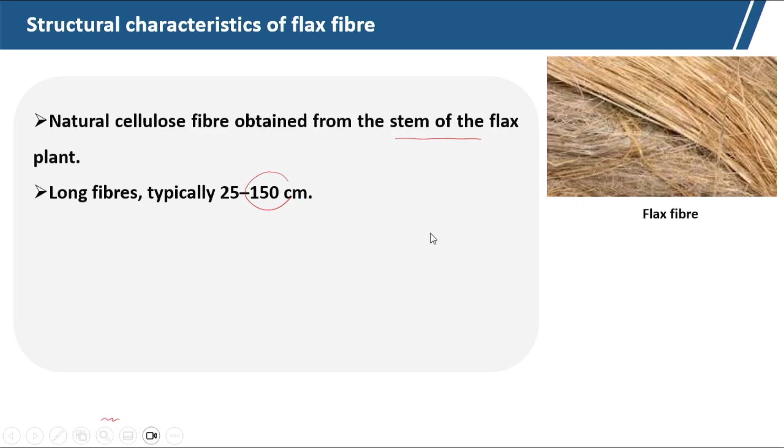It can be as long as 150 centimeters, a very long 1.5 meter fiber. So, typically from 25 centimeters to 150 centimeters, a relatively coarser fiber, not very coarse, basically 12 to 16 micron, with a slightly convoluted smooth surface with nodes along the fiber length. And sometimes we get longitudinal serrations.

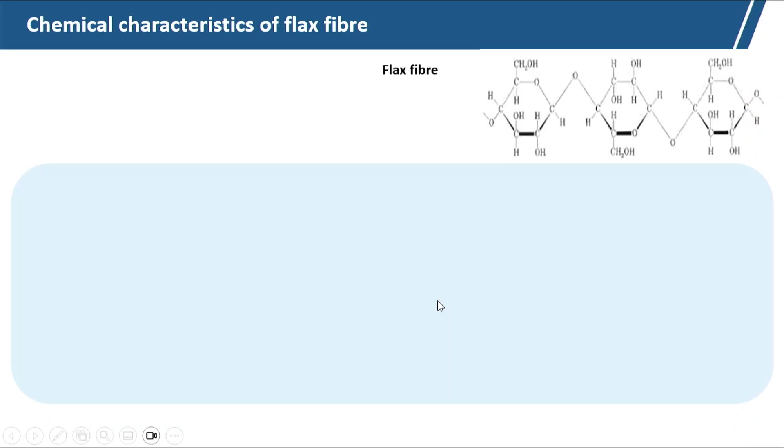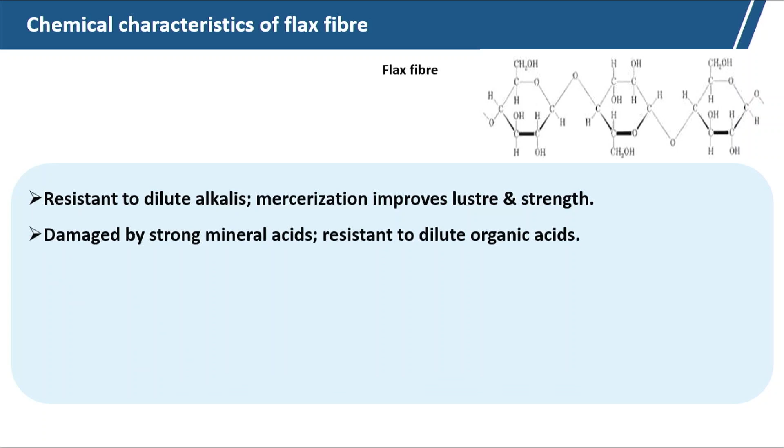Now, if we see the chemical characteristics, these are basically cellulose fibers. So, it is resistant to dilute alkali, and mercerization improves its luster and strength. It is damaged by strong mineral acid, resistant to dilute organic acid, and we can bleach it with hydrogen peroxide or sodium hypochlorite. It is resistant to most organic solvents, acetone, alcohol, and burns readily with a paper-like smell, like cotton.

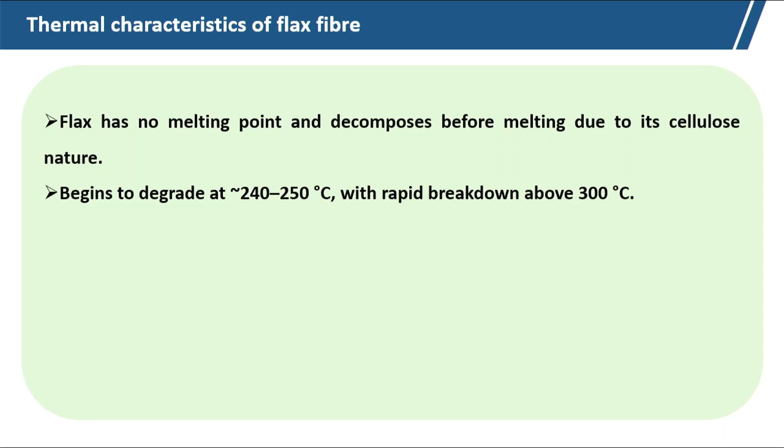If we see the thermal characteristics, flax has no melting point and decomposes before melting due to its cellulosic nature, like cotton fiber. It begins degradation around 240 to 250 degrees Celsius. Just like cotton, it rapidly breaks down above 300 degrees Celsius. Ignition point is 480 to 500 degrees Celsius, and it rapidly burns and gives a paper-like smell. Prolonged heating causes yellowing and loss in strength.

Thermal conductivity is higher than cotton and wool fiber. That is why this fiber is typically called a cool fiber, due to high Qmax, that is, instantaneous heat absorption. It loses insulation ability when wet, but still dries quickly, because its thermal conductivity increases with moisture absorption. It is flammable like other cellulose fibers, but with less afterglow than cotton. Cotton gives the higher afterglow.

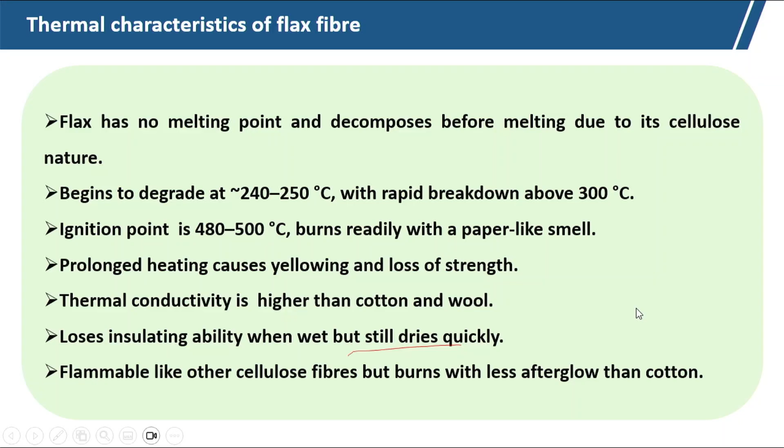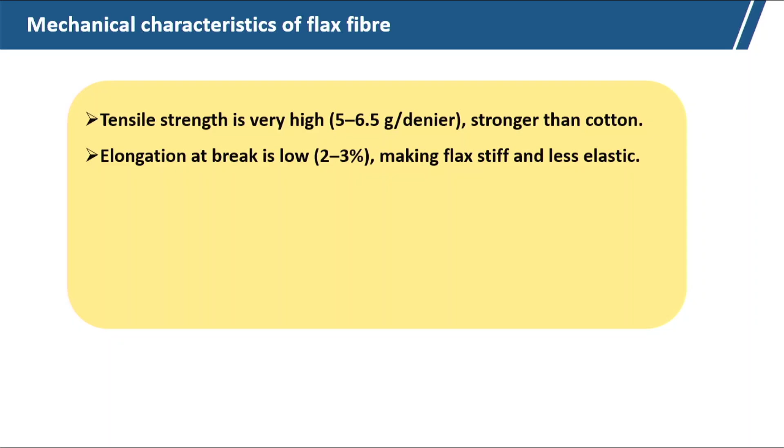Mechanical characteristics of flax fiber: tensile strength is very high, around 5 to 6.5 grams per denier. It is much stronger than cotton. Elongation at break is typically 2 to 3%, lower than cotton. It makes flax stiffer and less elastic. Elastic recovery is poor, with limited flexibility compared to wool and cotton. So, it gives lower elongation, but the uniqueness is there.

It is basically a stronger fiber, and also its thermal conductivity is more. So, it gives a cool touch, and due to the higher Qmax value, Qmax meaning instantaneous heat absorption, fabric made from flax fiber is for summer wear. Due to the very high tensile strength, it is used for technical applications, different protective applications. Abrasion resistance is moderate and it does not spring back easily because of its lower elastic recovery.

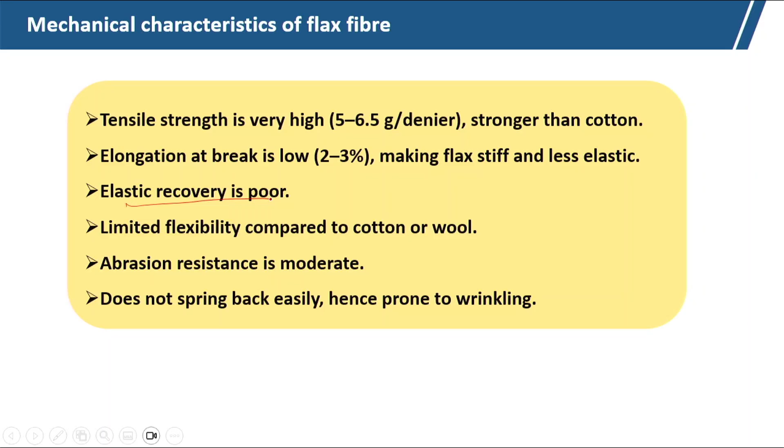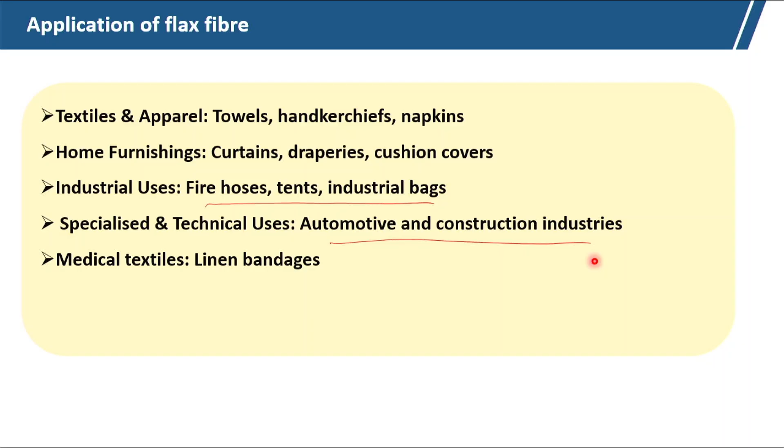The applications we can see here: textile and apparel applications, handkerchiefs, napkins, towels, home furnishing, curtains, draperies and cushion covers. Fire hose, tents, industrial bags, due to its higher strength, automotive and cushions, in the construction industries we can use it, medical linen, bandages for medical applications, and canvas.

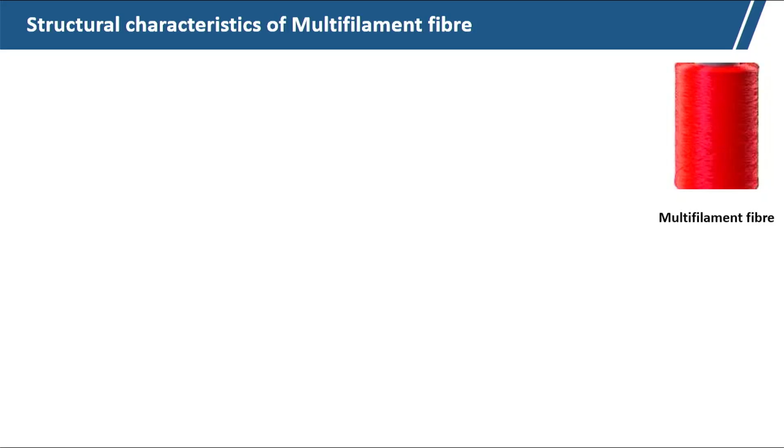Multi-filament fibers are basically continuous filaments. These may be natural and also in synthetic form. The structure of multi-filament fibers is where a number of continuous filaments are bundled together, with a smooth and uniform structure because of the continuous length, and high tensile strength. Because staple fibers are discontinuous, their tensile strength comes mainly from frictional cohesion and the cos theta component of the fiber strength, as I have mentioned. So, in multi-filament or monofilament yarn, the actual filament strength is used 100%.

They are flexible and soft, producing lustrous fabrics, but the fabrics are not as soft as staple fiber fabrics. It can be textured or twisted for bulk and elasticity. So, if we want to increase the elasticity, we can apply twist, and if we want to increase bulk, we can form a texture.

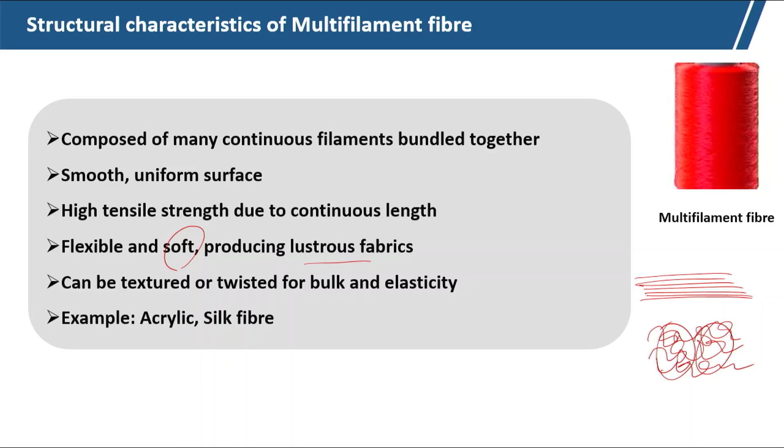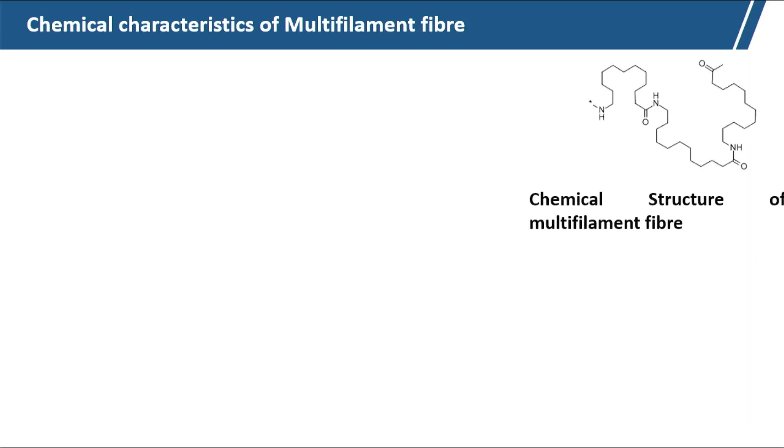So, chemical characteristics depend on the chemical nature of the polymer. So, chemical structure, because depending on the fiber, whether it is synthetic or natural. So, what is their composition. So, whether it is chemically stable depends on the fiber type, and dye absorption also depends on the type of fiber used,

and whether it is resistant to chemicals, acid or alkali, depends on the type of fiber. And it is less prone to degradation than staple fiber. That is basically due to the structure of yarn. For the same fiber, like acrylic, if we use acrylic in filament form and acrylic in staple form, typically the degradation of the staple fiber material will be a little bit higher because of the structure, and it can absorb more chemical and get degraded.

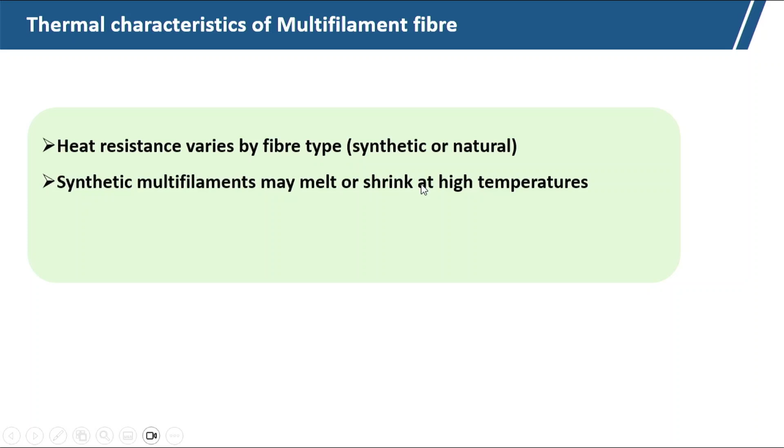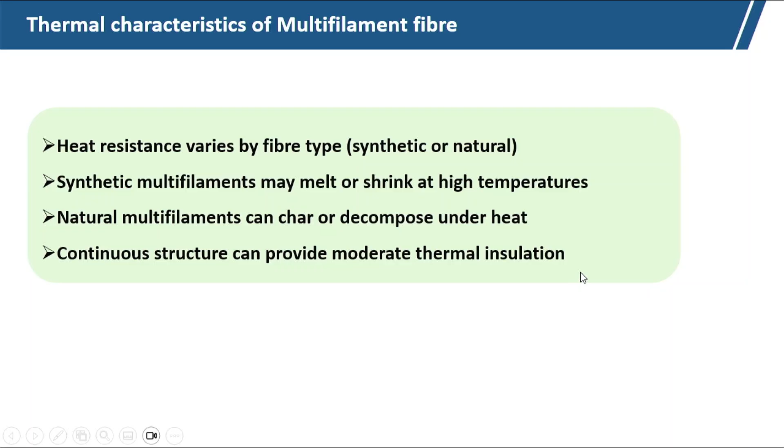Thermal characteristics of multi-filament fibers, again, depend on the type of fiber. It varies, synthetic or natural fiber, and synthetic multifilament may melt or shrink at high temperature, but natural multifilament, that is a natural filament yarn, silk is an example. So, natural multifilament can char or decompose under heat. So, silk is the only natural multifilament we can say. Continuous structure can provide moderate thermal insulation. So, if it is staple fiber, then we can have air entrapment, and the thermal insulation may be higher.

So, mechanical characteristics: higher tensile strength due to continuous structure, good elasticity and flexibility, smooth surface, basically due to the continuous structure the surface will be smoother than the staple yarn, and durable and resistant to breaking.

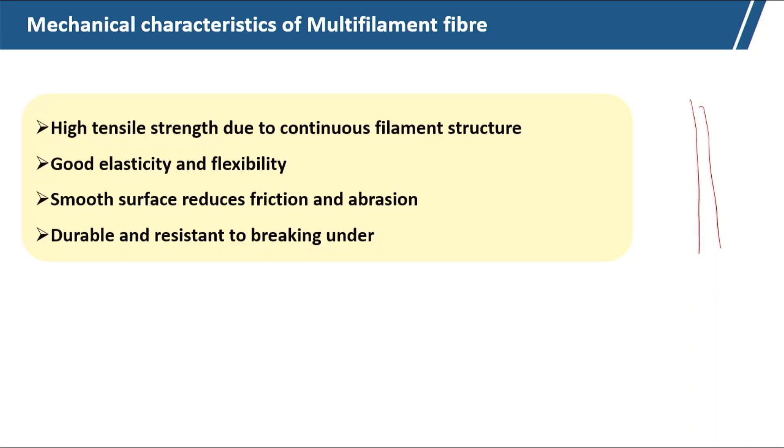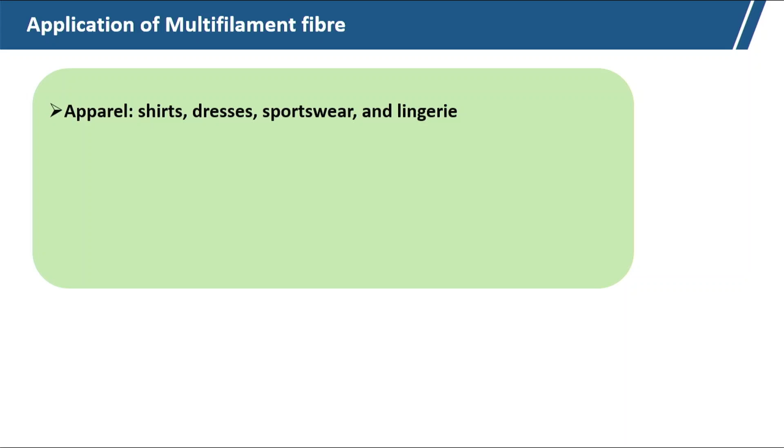Applications like shirts, dress materials, sportswear, home textiles, curtains, upholstery, industrial rope, nets, tire cords, there we need the multi-filament yarn. For tire cord we cannot use the staple fiber. Technical textiles, we can use it in filtration, composites, and geotextiles. Silk is one example of natural multi-filament yarn.

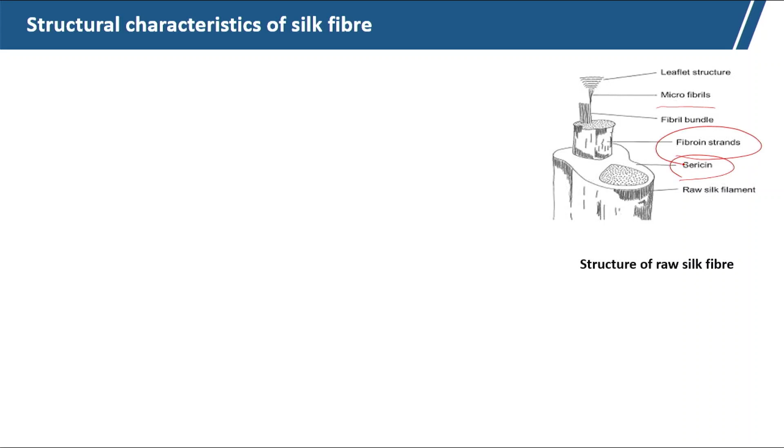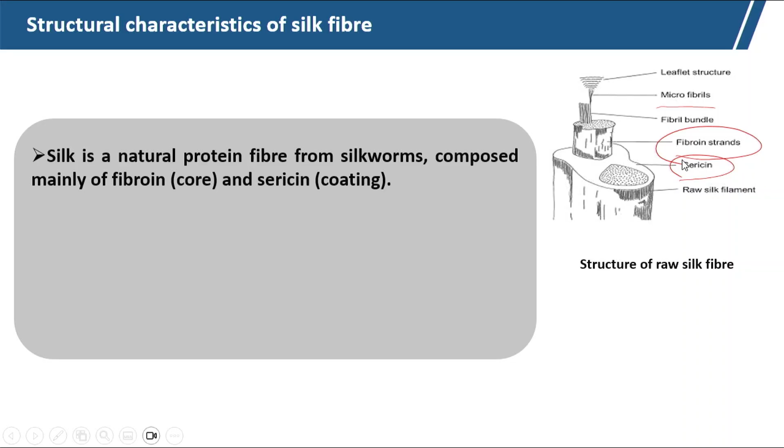Now, let us see the structure of silk. This is the typical structure here. Okay. These are the microfibrils. It has got two components, one is sericin, which is a gummy component, and fibroin. So, it is a natural protein fiber from silkworm composed mainly of fibroin, which is the core, the fibrous component, coated by the sericin gum, and ultimately when we use silk as a fiber, we have to remove the sericin component.

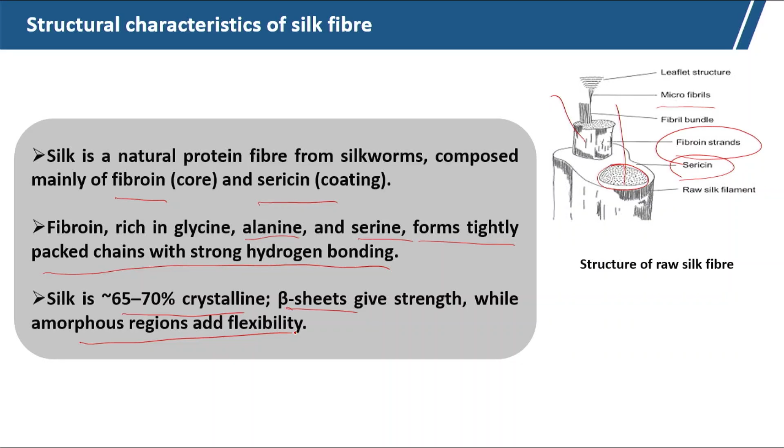So, fibroin is rich in glycine, alanine and serine. These form tightly packed chains. You can see these are very tightly packed chains with strong hydrogen bonding. So, this gives high strength. It is 65 to 70% crystalline; beta sheets give strength, while amorphous regions add flexibility. So, that is the silk fiber structure.

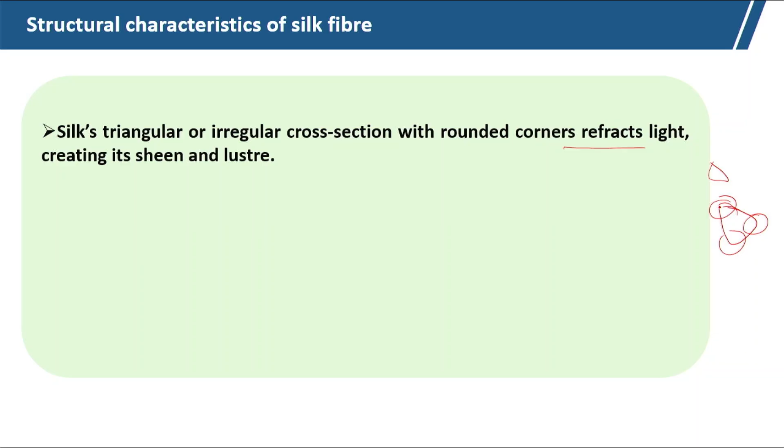It has a typically triangular or irregular cross section with round corners. So, if you see the silk fiber, at the corner it is a little bit round, which refracts light, creating sheen and lustre. That is the beauty of silk, a natural fiber which is lustrous due to the triangular cross section with round corners. This shape refracts the light. Smooth soft surfaces are covered by a thin layer of sericin, removed during degumming.

So, we can see here the silk fiber, typically triangular shape with round corners, and this is covered by a thin layer of sericin, and degumming is required where we remove the sericin. It has very fine and uniform filaments, 10 to 15 micron in diameter. Molecules are highly oriented along the fiber axis, which enhances the tensile strength.

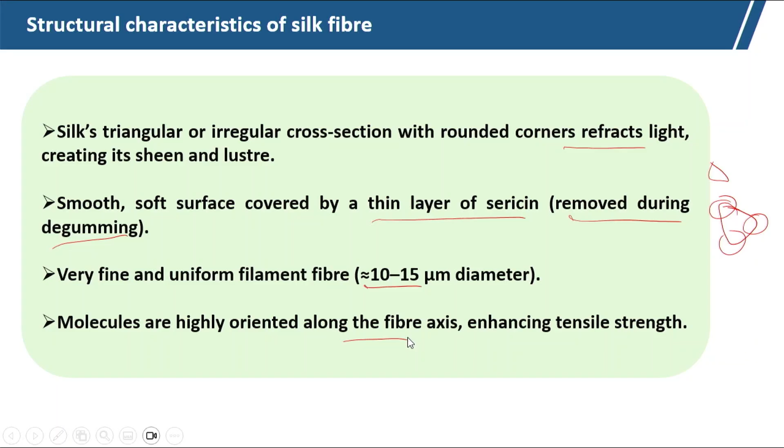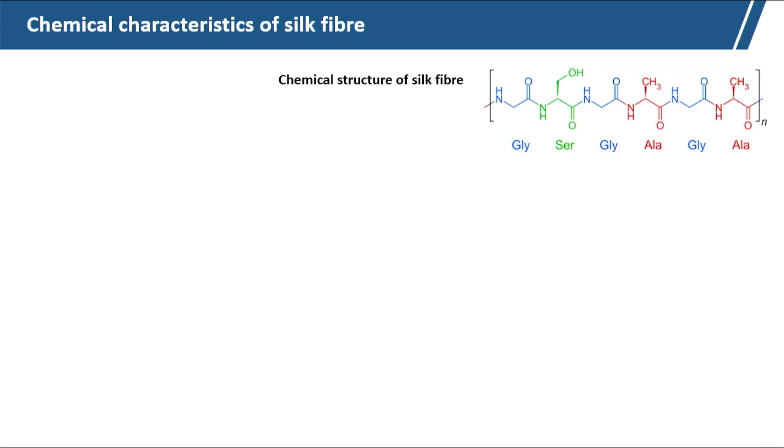Now, the chemical characteristics of silk fiber: it is rich in glycine, alanine and serine, which enables tight molecular packing. It is insoluble in water, but soluble in strong acid, concentrated alkali and certain salts. These can dissolve it. It is resistant to weak acid, but damaged by strong acid, because it becomes soluble in strong acid. So, to weak acid it is resistant.

It is weakened by prolonged exposure to sunlight, and has good dye affinity due to amino groups in fibroin. So, due to these amino groups, the dye affinity is very good. It is easily damaged by chlorine bleach.

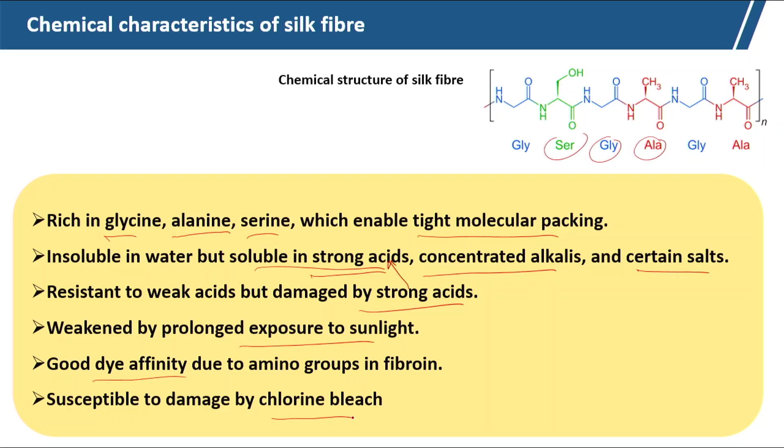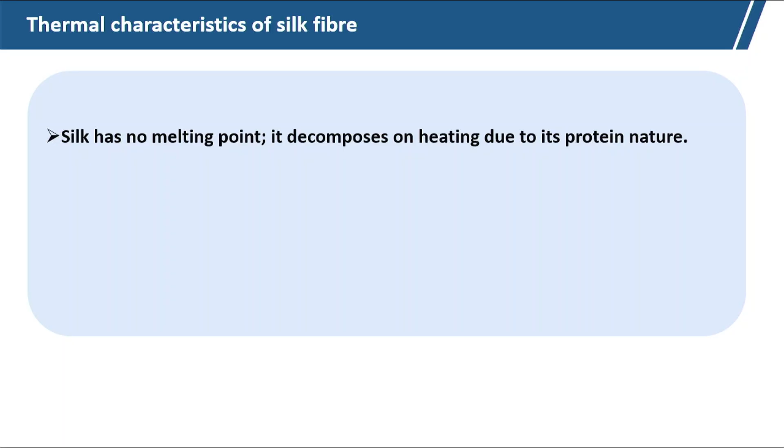Now, thermal characteristics: silk has no melting point and decomposes on heat due to its protein nature. It loses strength at 140 degree Celsius and decomposes at 170 degree Celsius. So we can use the wool or silk fiber at low temperature applications. It burns slowly, leaves crumbled ash with a smell like burning hair, like other animal fibers also.

Low thermal conductivity makes it good for insulation and comfortable wear. So, due to the low thermal conductivity, in earlier days silk was used for cold climate clothing also, mainly wool and silk, people used to use.

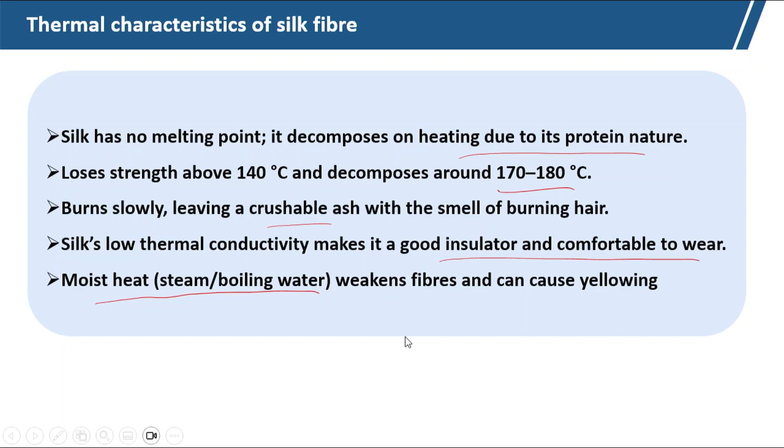Moist heat, steam or boiling weakens the fibre. Now, mechanical strength of silk is very good, so high tensile strength and fibroin beta sheet gives durability. That is why in old days this silk fibre was initially used as a protective textile.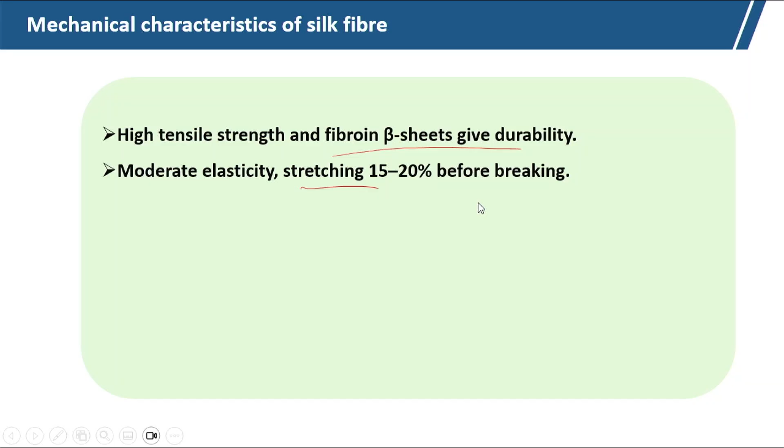From mechanical characteristics: moderate elasticity, stretchability is 15 to 20% breaking elongation. Crease resistance is poor, it gets wrinkled easily. Very fine filament contributes softness and sheen. Abrasion resistance is moderate; under repeated rubbing the fibers get weakened and damaged.

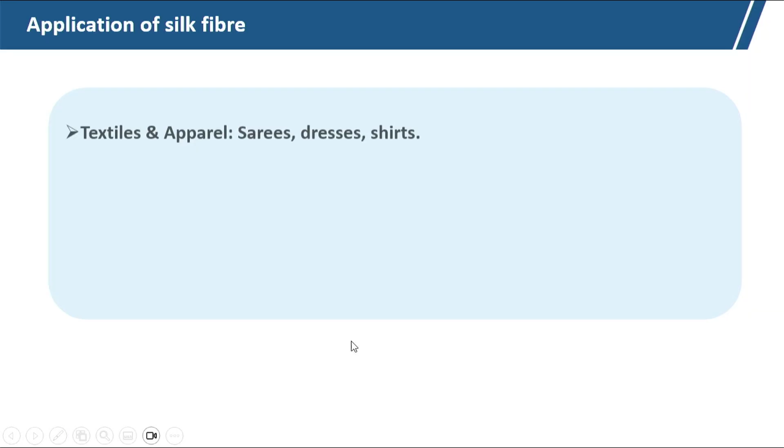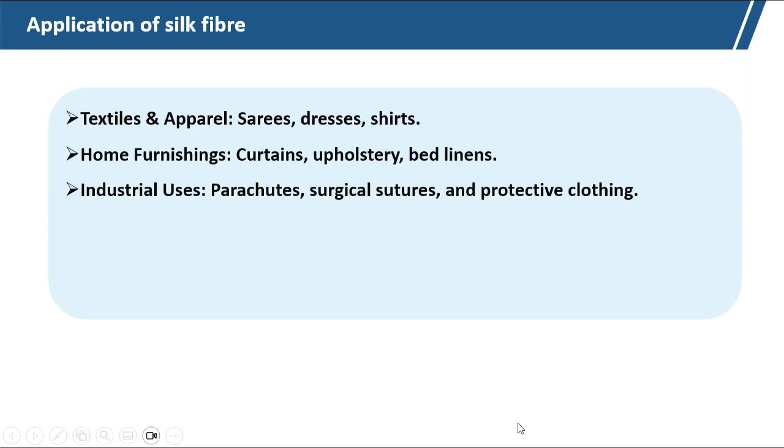The applications: textile and apparel, even sari, dress, shirts, we use this silk fibre. Home furnishing: curtains, upholstery, bed linen. Industrial applications: parachute, surgical sutures, protective clothing, as I mentioned, mechanical thread. So we used to use silk fibre blended with wool, cotton, synthetic fibre to enhance its texture and strength. Silk can be blended with other fibers. There are different specialty products: silk carpets, embroidery threads, art canvas.

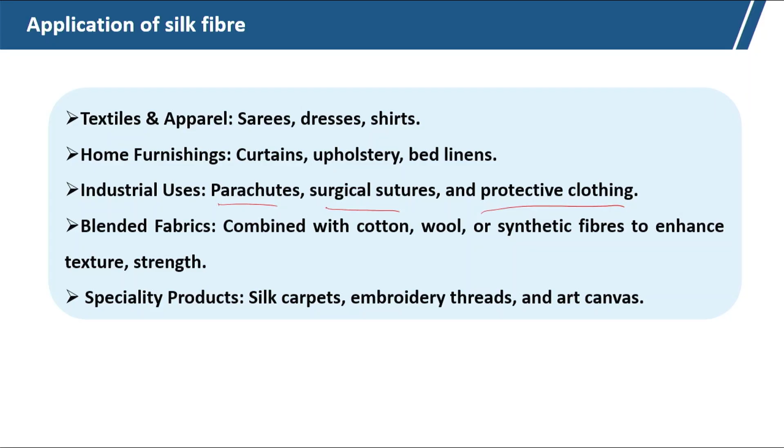This is acrylic, in continuous filament form, or even in staple form we can use the synthetic fibre. And you can see the acrylic structure.

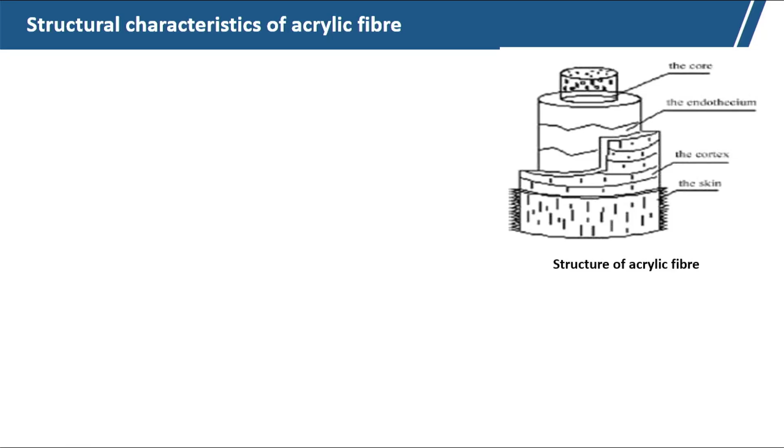Synthetic fibre made from polyacrylonitrile, a linear polymer with repeat unit CH2-CHCN. Semi-crystalline or crystalline regions provide the strength, amorphous regions provide flexibility. Usually round, dog bone, or trilobal structure, and smooth surface.

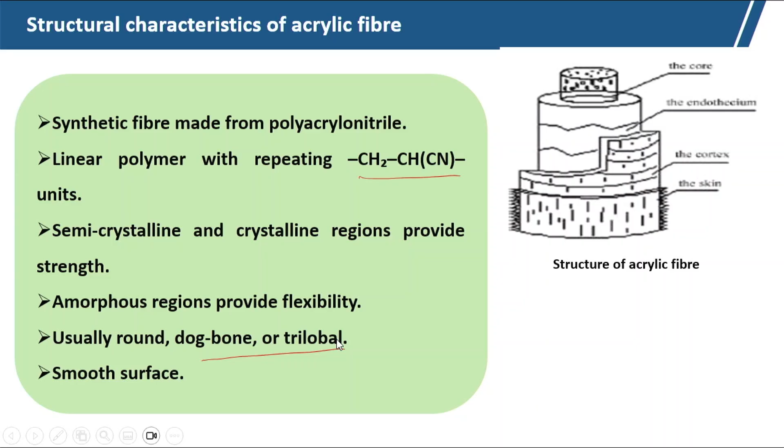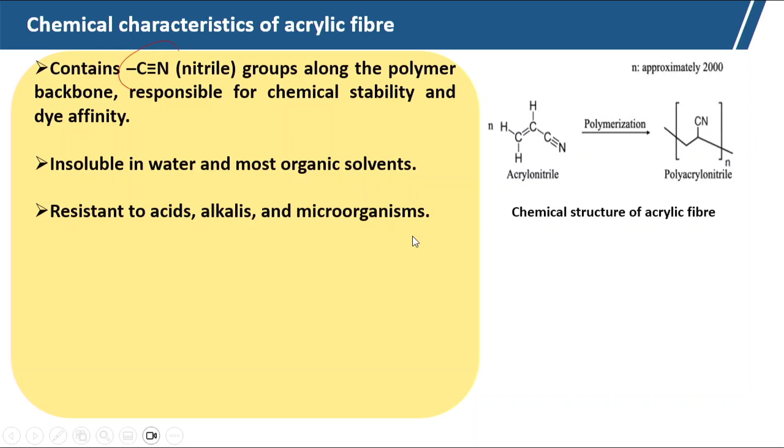Chemical characteristics: it contains a C triple bond N, the CN group, along with the polymer backbone, responsible for chemical stability and dye affinity. The triple bond is actually the nitrile bond, responsible for chemical stability. It is insoluble in water and most organic solvents. This gives chemical protection; it is resistant to acid, alkaline and microorganisms, and does not get affected by acid, alkali or microorganisms.

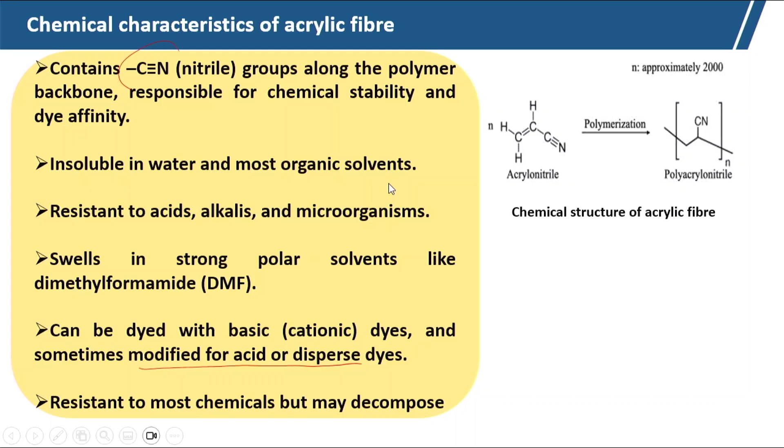It swells in strong polar solvents like DMF, and can be dyed with basic cationic dye, sometimes modified for acid or disperse dye. So acrylic is used mainly where attack from acid, alkali or microorganisms is a concern, for protective applications. It is resistant to most chemicals, but may decompose under certain conditions.

For fire protective application we can use acrylic fiber, that is, mod-acrylic is used for such applications. Low thermal conductivity means the fiber provides good warmth and insulation, that is why it replaces woolens in cold weather clothing. Hot steam and ironing at high temperature may cause shrinkage, so we must maintain shape at low to moderate temperature when using this acrylic fiber.

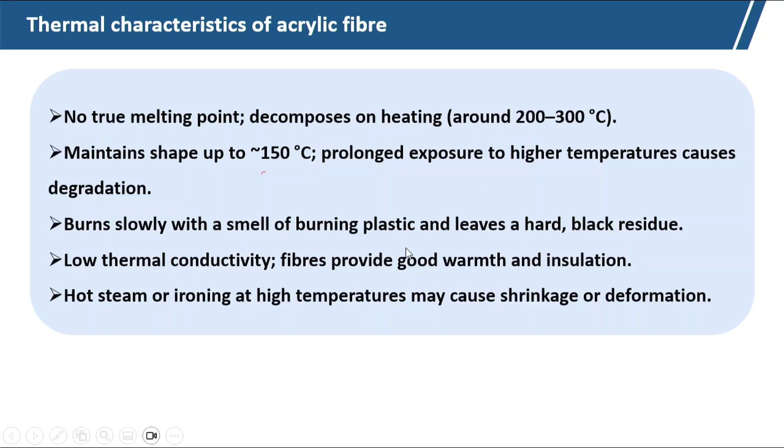Mechanical characteristics: tensile strength is moderate, generally weaker than wool and nylon. Moderate elasticity, 10 to 20% breaking elongation, good recovery from bending making it wrinkle resistant, and bending strength is very high. That is why this fiber is used in woolens, though it gets pilling.

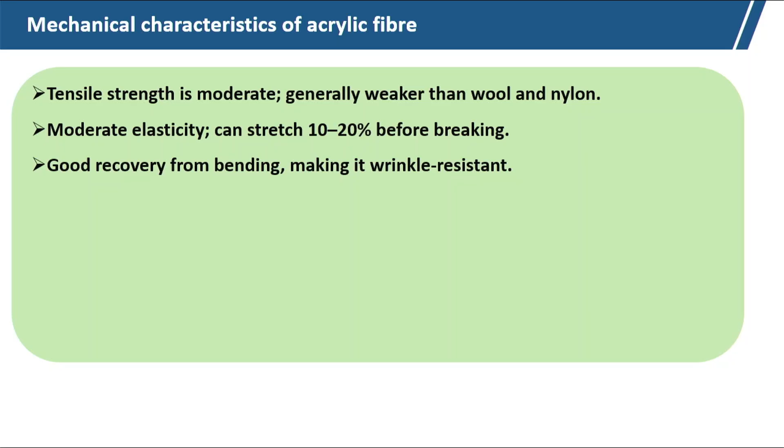The presence of acrylic fiber creates a pill in the woolens. It is soft and wool-like, suitable for warm and comfortable fabric. Abrasion resistance is moderate and may pill with prolonged rubbing, due to the high bending strength. Low moisture absorption, 1 to 2%, so minimal weakening when wet.

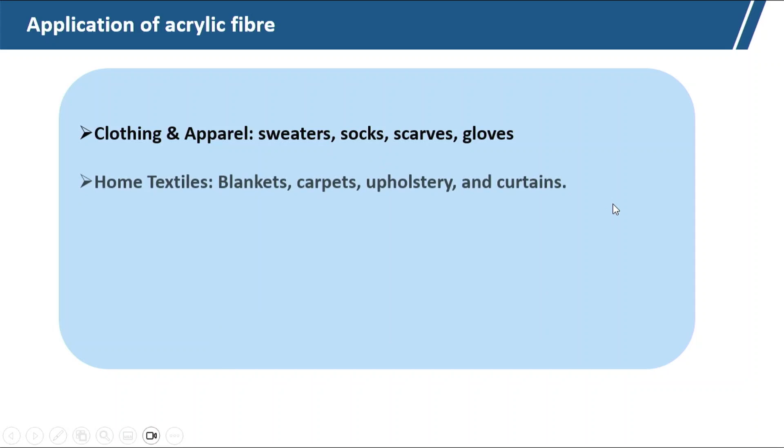Resistant to insects and most chemicals, so it can be used in many protective applications. Applications include clothing and apparel widely used for sweaters, socks, scarves, gloves, home textiles like blankets, carpets, upholstery, curtains. Industrial uses include outdoor fabric, awnings, insulation materials, since it is not easily affected by environmental conditions. It is also blended with wool and cotton to improve texture.

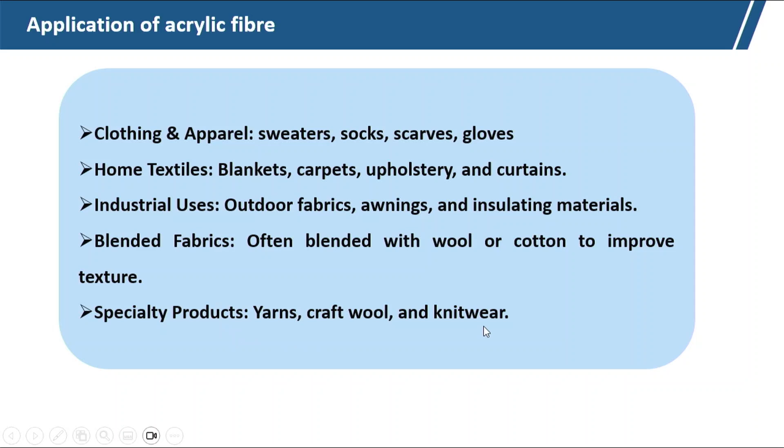Specialty products: yarn, craft wool and knitwear. Now, coming to one specialty fiber which is widely used in the modern era, the applications of core sheath fiber are very widely used by people.

If we see the structural characteristics, it is composed of two distinct components, a central core and outer sheath. This core sheath fiber can be spun by modifying the spinneret.

So, in core sheath fiber, one example is the low melt fiber, suppose polyester, when we are trying to make nonwoven. In nonwoven industry, particularly for applications like filter fabric, we use bicomponent fiber.

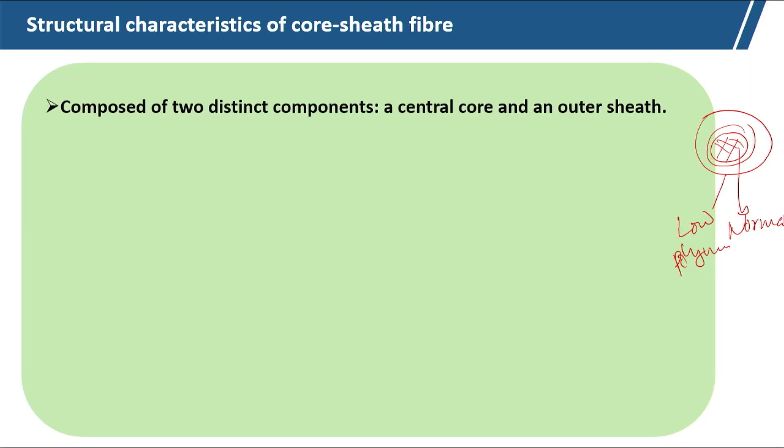It is a bicomponent fiber, core sheath type fiber, where the normal polymer is at the core and low melt polymer is used at the sheath. After making the nonwoven fabric, if we use thermal bonding or hot air bonding, this low melt fiber will melt and form the bonding. So, this has very wide applications.

Core provides strength, elasticity and other mechanical characteristics. The sheath enhances surface properties like softness, dyeability, and chemical resistance. So if we want high strength and dyeable fiber, we can use some polymer at the core which provides high strength, and at the sheath we can use a dyeable polymer.

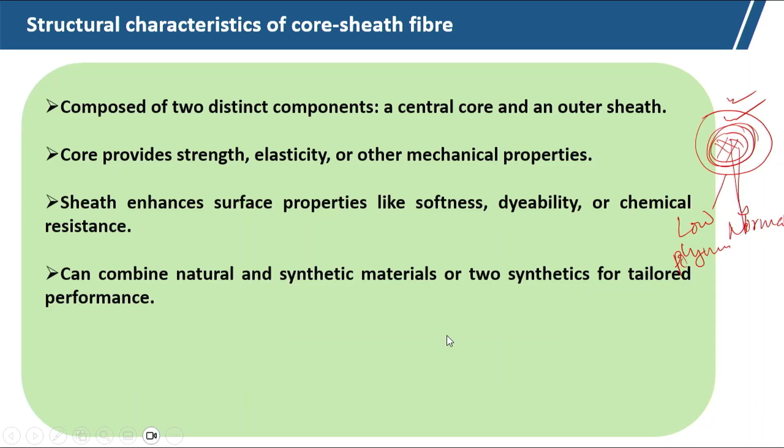We can combine natural and synthetic material, or two synthetic materials, for tailored performance. Often produced as continuous filament. Hollow polyester fiber is also one example.

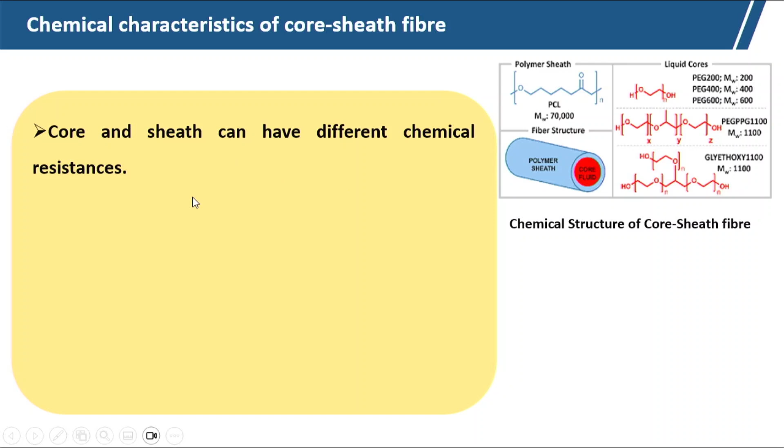Now, chemical characteristics depend on the type of polymer we use. Core and sheath can have different chemical resistance due to the presence of different polymers. Sheaths are often designed for dyeability, chemical protection or UV resistance. We can use such polymer at the sheath, shown as the polymer sheath in blue color.

There we can use a polymer which will be UV resistant or dyeable, and for the core we can use a polymer which will provide high strength. Core may provide chemical stability, strength or elasticity, allowing customization of fiber behavior under acid, alkali, and solvent conditions.

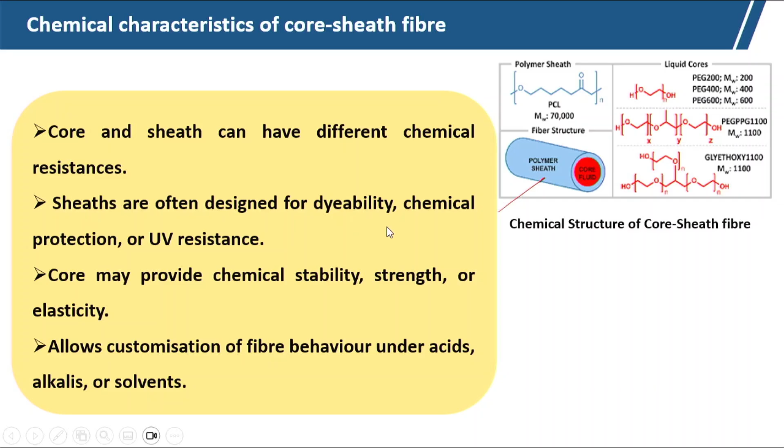Thermal characteristics again depend on the type of polymer. The core can provide heat resistance or thermal stability, and the sheath, often a low melt fiber, uses low melt polymer for bonding or surface modification. After making the nonwoven, we can melt the low melt component at the sheath, but the core component remains thermally stable and provides strength.

It is designed to withstand a specific temperature range depending on the application. The continuous structure helps maintain insulation.

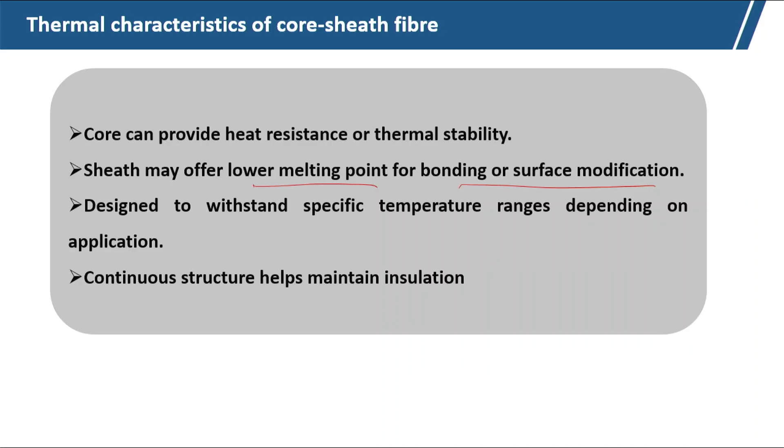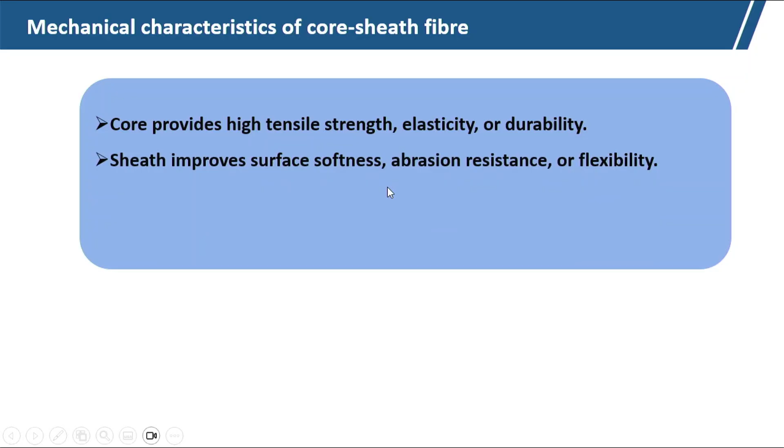Now, mechanical characteristics of core sheath fiber: the core provides high tensile strength, elasticity and durability, while the sheath improves surface softness, abrasion resistance and flexibility. The synergic structure enhances overall mechanical performance when core and sheath are taken together. It can be engineered for stretch, resilience and dimensional stability.

So, what are the applications? Let us see. Stretchable fabrics like elastic, sportswear, and hosiery, where in the core we can use polymer with high stretchability.

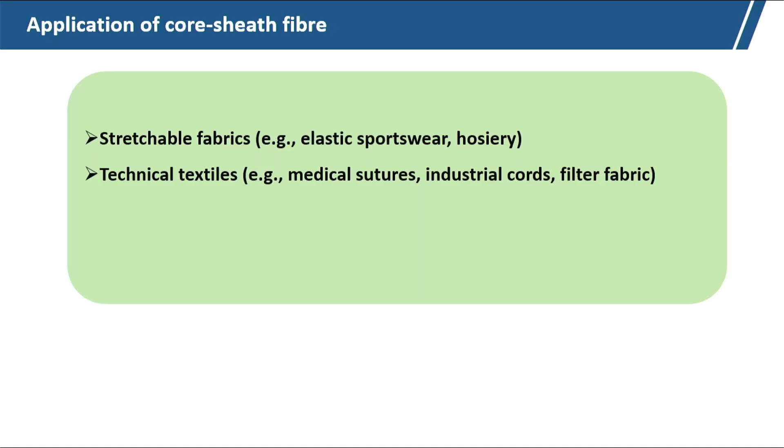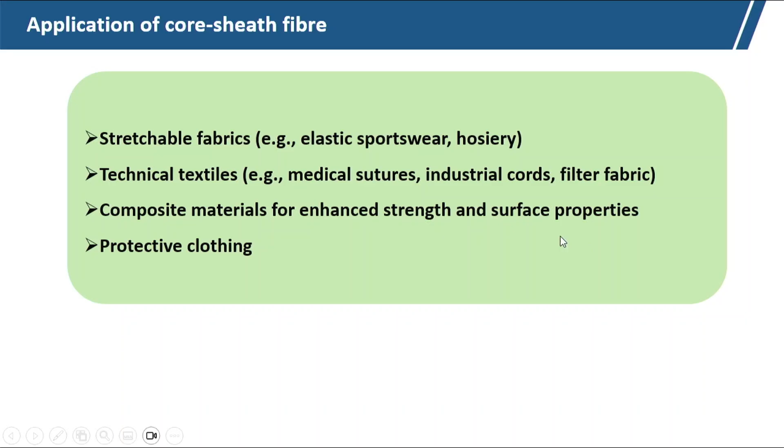Technical textiles, medical sutures, industrial cords, filter fabric - filter fabric needs to retain its structural integrity, so we use low melt polyester bicomponent fiber with the low melt polyester polymer at the surface, the sheath. Composite materials are used for enhanced strength and surface properties, and in protective textiles, core sheath type fiber is widely used nowadays.

Next is the microfiber. Microfiber is nowadays widely used for many protective applications, particularly for protection from bacteria and virus, like in filter fabric and masks. Now, structural characteristics of any microfiber - it is basically very fine, extremely fine, usually less than 1 denier in diameter.

So it is very fine in diameter, can be continuous filament or cut into staple. High surface area relative to weight, because of this very fine fiber the specific surface area will be very high. As the fiber diameter is very small, its bending rigidity will be very low, so it becomes soft, flexible and lightweight.

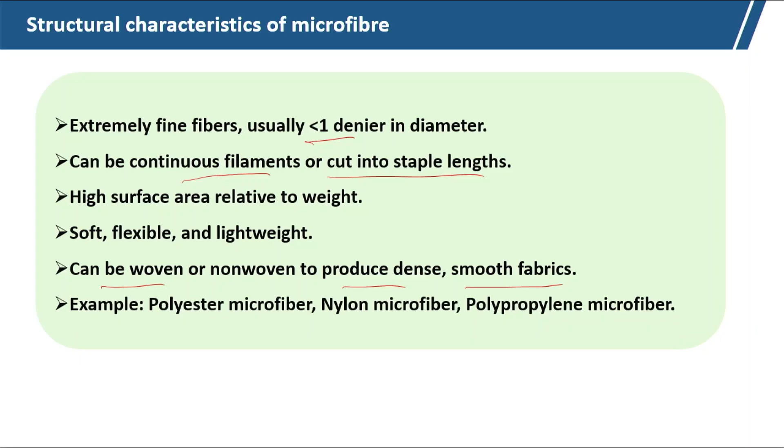It can be woven into fabric or nonwoven to produce dense, smooth fabrics. Polyester microfiber, nylon, polypropylene - different types of microfibers one can get.

Chemical characteristics depend mainly on the type of polymer - whether it will be chemically stable or not depends on the polymer type, and acid, alkali, solvent activity again depends on the type of polymer. It can be engineered to enhanced dyeability or stain resistance, low reactivity, making them durable in harsh environments. Microfibers are mainly made from polyester and nylon, which is why they are durable in harsh environments.

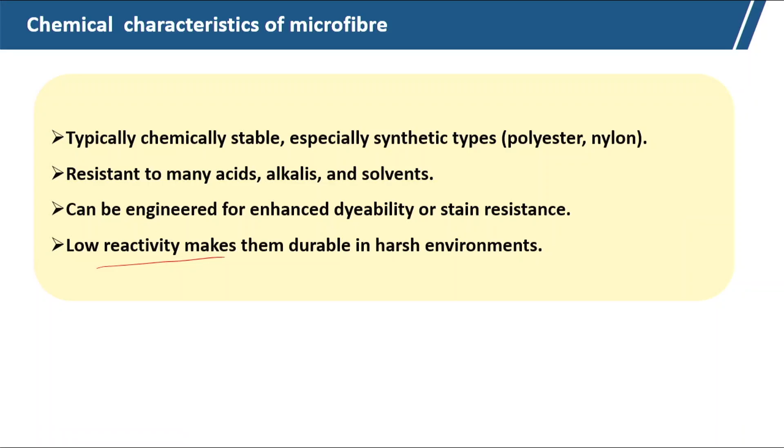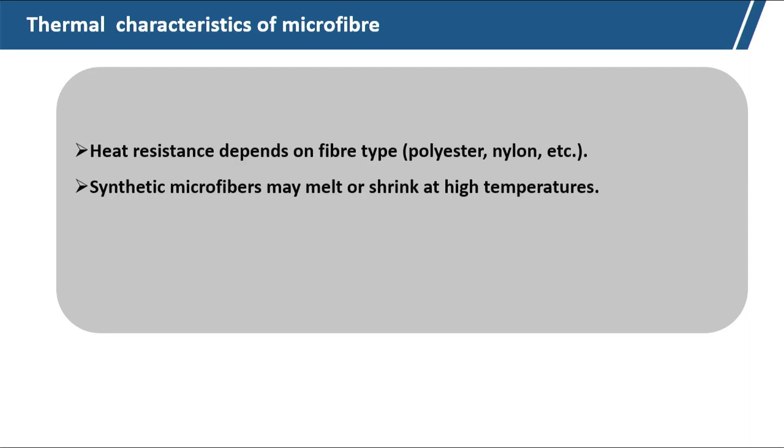Thermal characteristics again depend on the type of polymer being used. Heat resistance depends on the fiber type like polyester, nylon, etc., and synthetic microfiber may melt or shrink depending on the polymer type. It can provide good insulation due to the fine fiber and high surface area, and the continuous structure helps maintain fabric shape under moderate heat.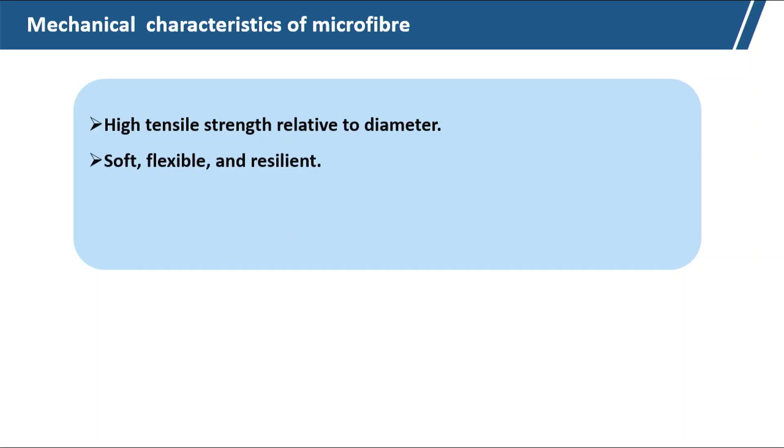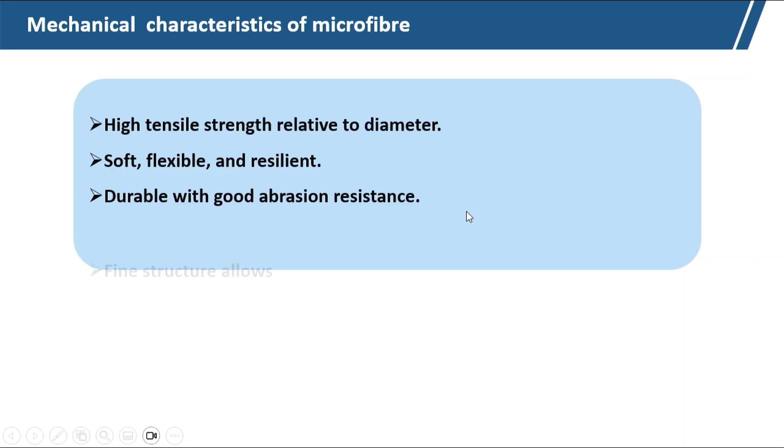Mechanical characteristics: you can see high tensile strength relative to diameter. It is soft, flexible and resilient, durable with good abrasion resistance, due to this fine structure.

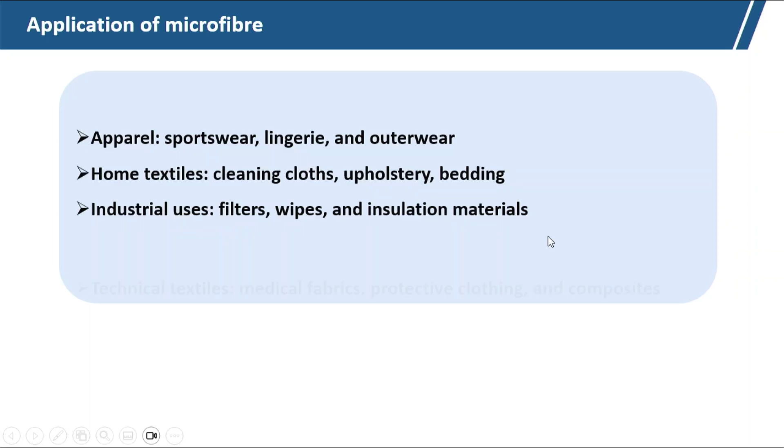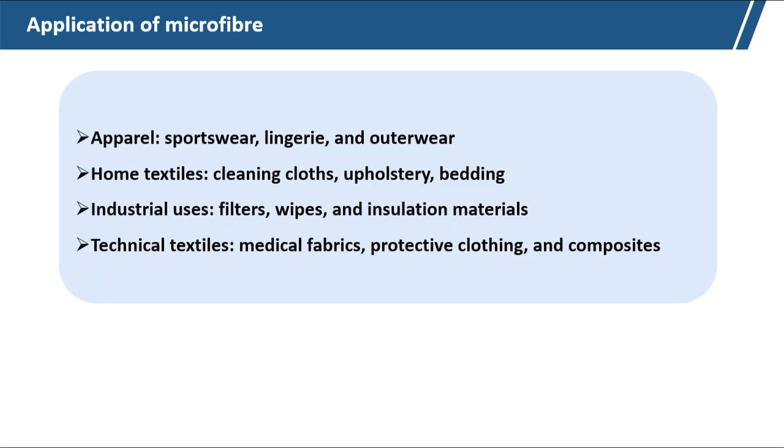It is used for apparel, sportswear and different outerwear, even inner garments, because of the very soft feel. Home textile, cleaning cloth, upholstery, bedding - all these applications, industrial filter, wipes, insulation material, medical fabric, protective clothing, composites. Microfibers are widely used nowadays for protective textiles. We will discuss these areas in detail.

Next comes the new generation fiber, nanofiber, which is very fine in diameter, at the nanoscale level. The structural characteristics of nanofiber: extremely fine fibers, typically less than 100 nanometers in diameter, with a very high surface to volume ratio. That is actually the uniqueness of this nanofiber, which changes the characteristics for the same polymer.

If we create a nanofiber from the same polymer, the fiber characteristics of the nanofiber versus normal fiber will be entirely different. It can be continuous or in a nonwoven mat, lightweight, flexible and often porous. For example, silk nanofiber, cellulose nanofiber, polyurethane nanofiber - these are different types. As mentioned, cellulose nanofiber characteristics will be entirely different from normal cellulosic fiber due to the very high surface area.

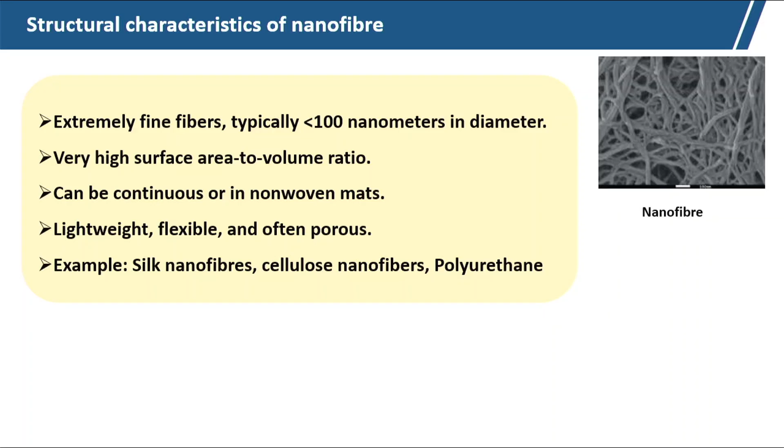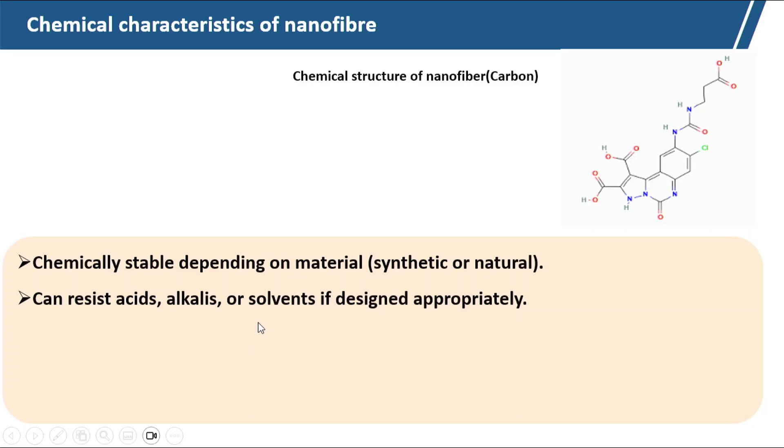Chemical characteristics again depend on the type of polymer being used, like carbon nanotube, which is made of carbon - chemically stable depending on the material, synthetic or natural. It depends on the type of polymer whether it can resist acid, alkali or solvents. Surface chemistry can be modified for hydrophobicity, hydrophilicity or functionalization. High surface area allows enhanced reactivity and coating capability - this is important for nanofiber.

So its total characteristics change while keeping the same polymer. If we enhance the surface area, it will change the reactivity and coating capability.

Thermal characteristics of nanofibers: heat resistance depends on the fiber material, synthetic or natural. Synthetic nanofiber may melt or degrade at high temperature. It can provide thermal insulation due to the fine diameter and porosity, and is often used in applications requiring lightweight, heat resistant mats. These are specialized applications - we have to find the applications of nanofiber.

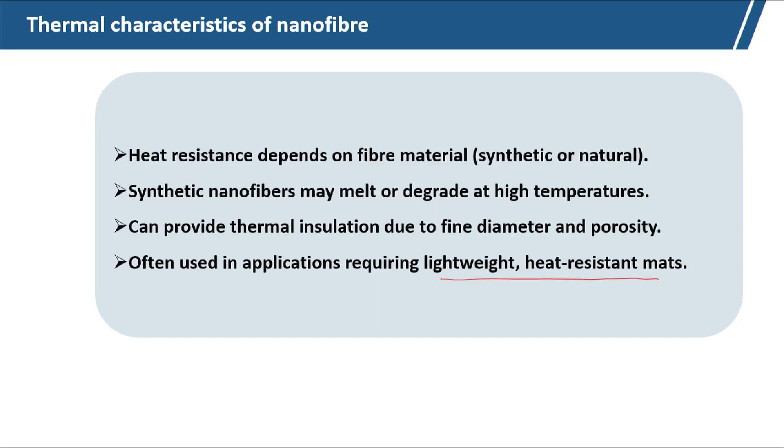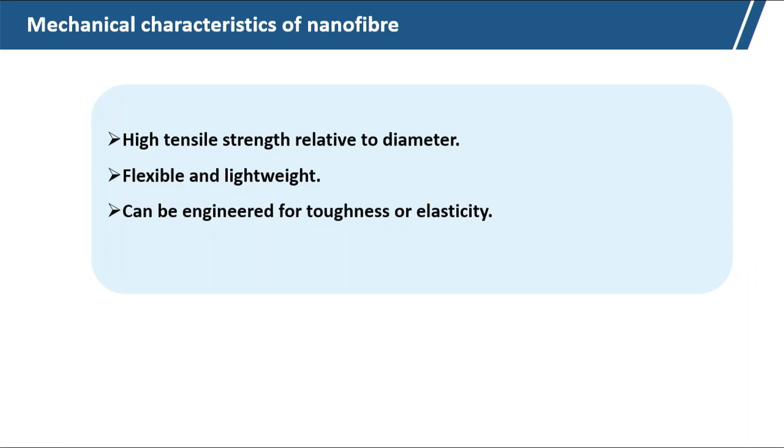It can be engineered for toughness or elasticity, so that we can create the fiber. It often forms strong nonwoven mats with good structural integrity - nanofiber can be directly made into nonwoven form, which will be good with good structural integrity due to very high surface area.

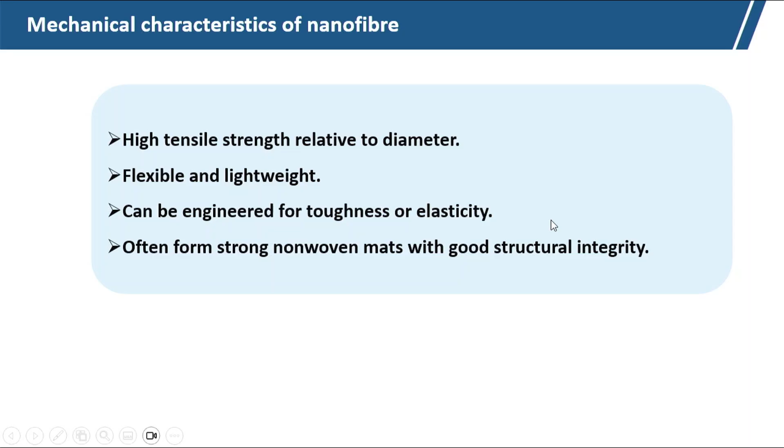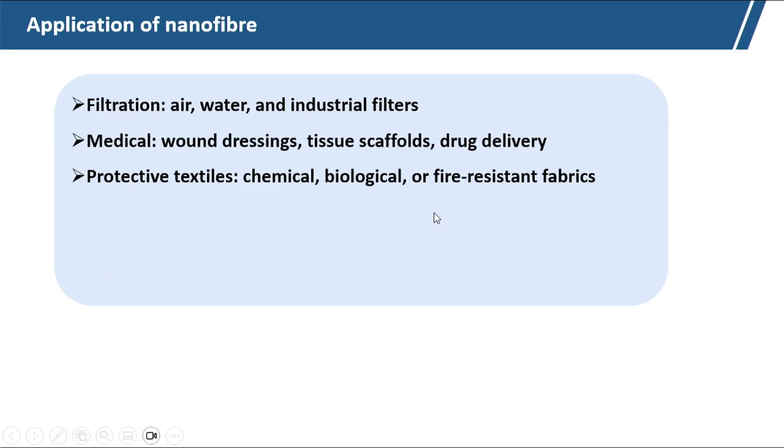Applications of nanofibers: you can see a wide area in filtration, in protection from the environment like water pollution - for these applications nanofiber is widely used. In medical textiles - wound dressing, tissue scaffold, drug delivery - nanofibers are used widely. In protective textiles, like protection from chemical, biological or fire resistant fabric. In electronics and sensors - conductive mats, batteries - we use these nanofibers, and in composite reinforcement for very lightweight materials.

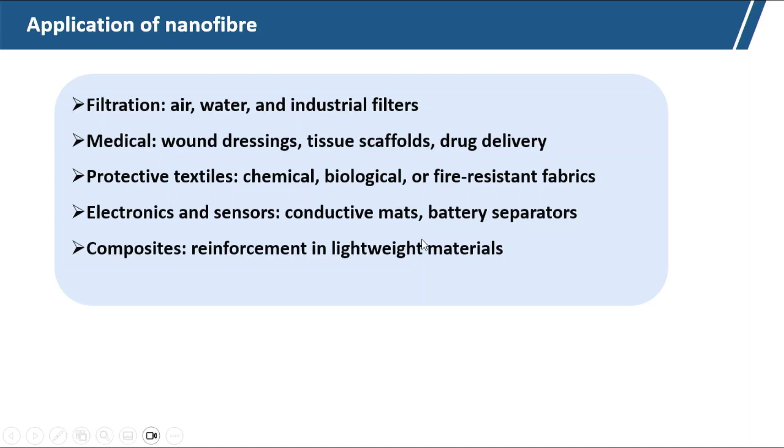Now we will start yarn structure, different types of yarns used for different protective textiles. This will continue in the next session.